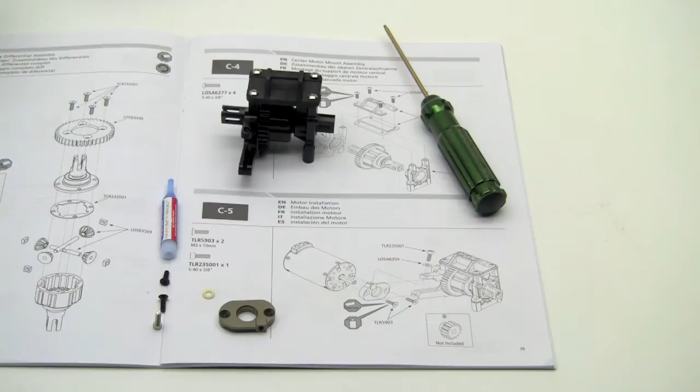We are on to step number C5. Fairly simple step. I've gotten our parts out that we're going to need here, and we will get rocking and rolling on it. The only thing that we are minus is our motor.

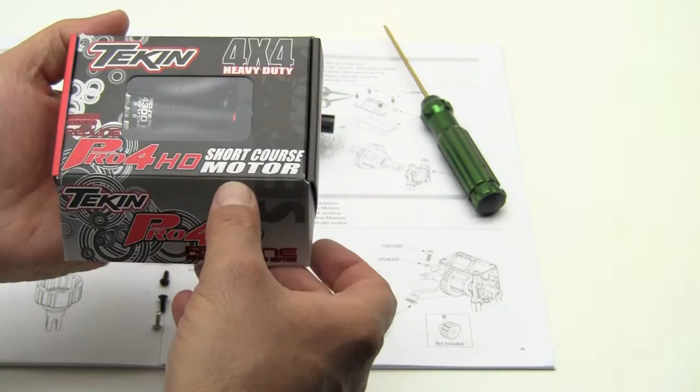So let's go ahead and open our motor up. We've got a Tekin Redline here, which is the Pro 4 HD motor.

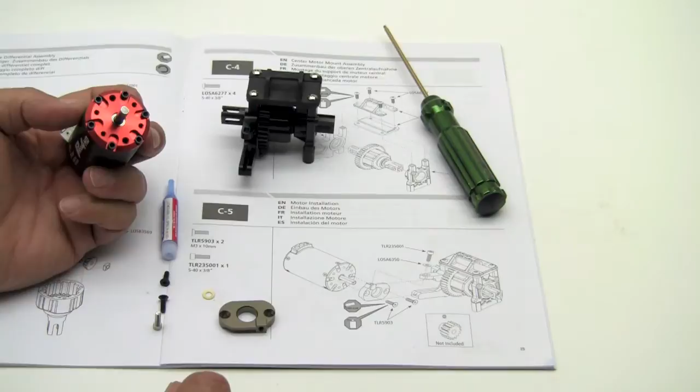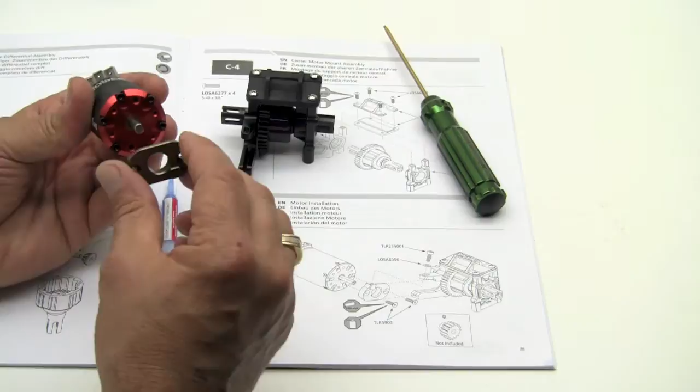Very nice motor, heavy. So we are going to install the motor mount, which is this metal unit, onto our motor. I'm going to follow the directions here and point my wire connections straight up in the air. We may come back and revisit that depending on how our wiring and our setup looks, but we're just going to go ahead and install this for the video.

And the motor mount holes are going to line up with the holes in the motor. Provided are the screws.

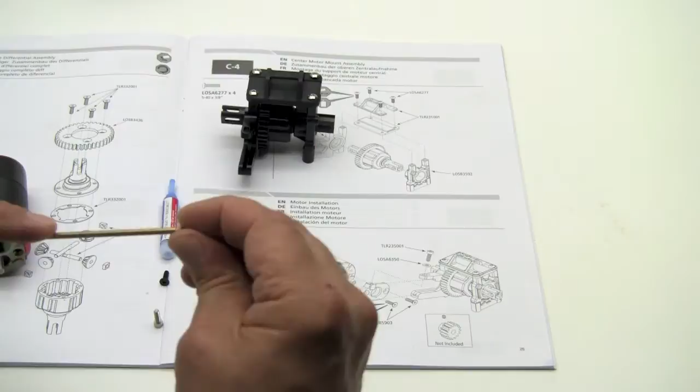Hey, it actually fits into the driver. Look at that. I'm going to use a little Loctite on there.

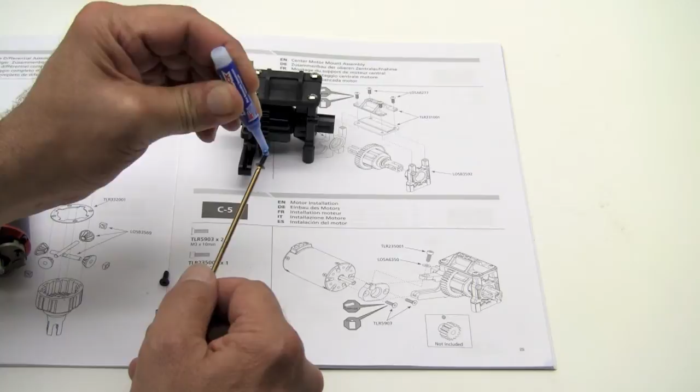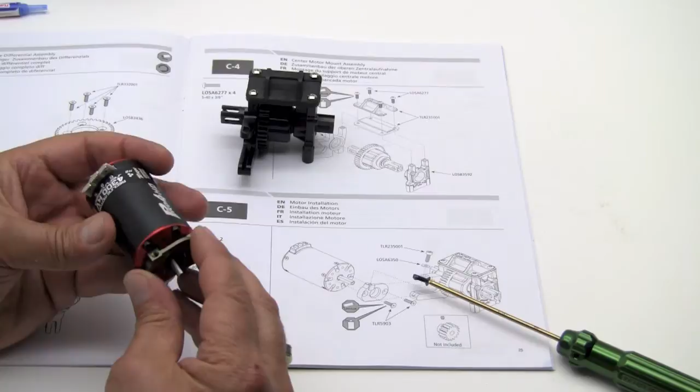And again, we are going to take a look at the mount and the motor. With the mount, we want the screw hole to be up in the air. And just by looking at the directions, for now, we might want to change the angle of the motor to clean up wiring or avoid anything. But right now, we're just going to mount it straight up and down.

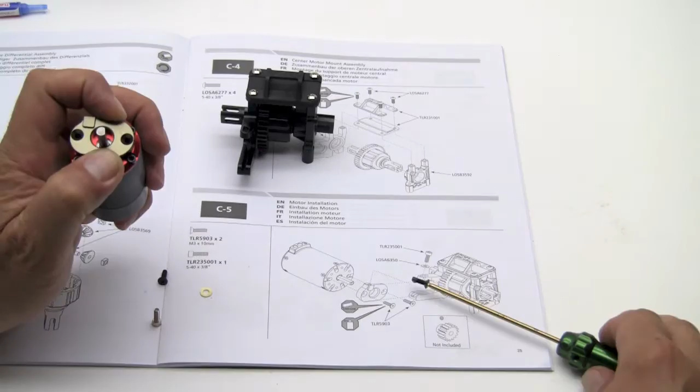The motor screw in. There's one.

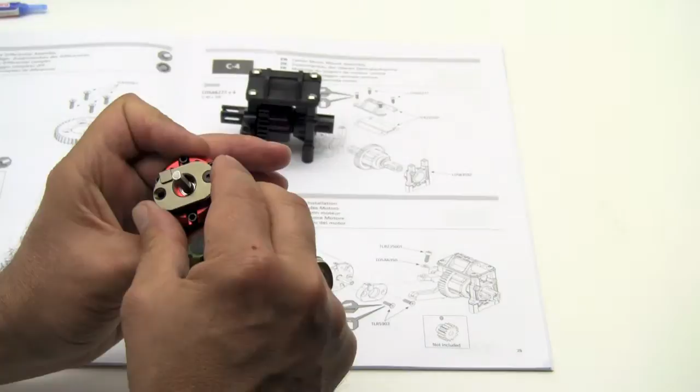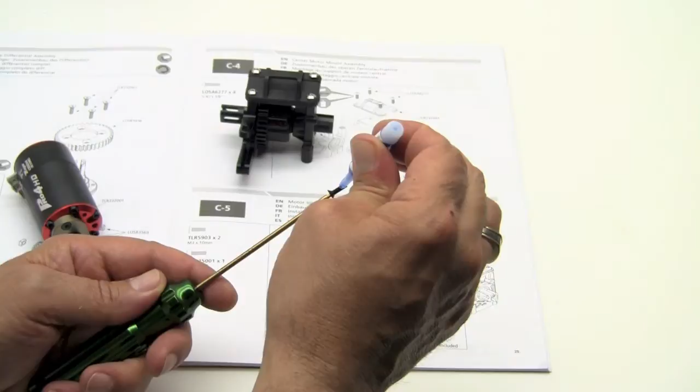Come on. I don't really want to put a lot on there, just a little bit.

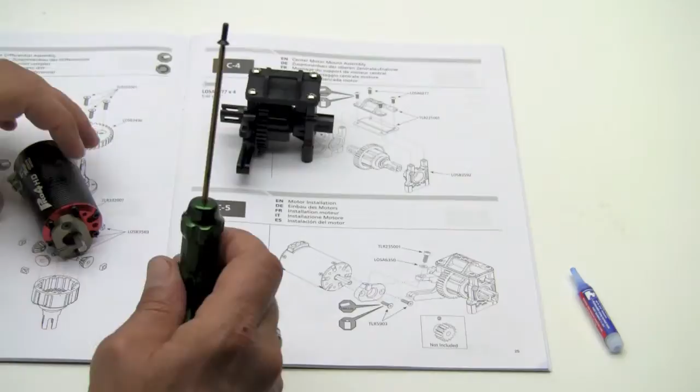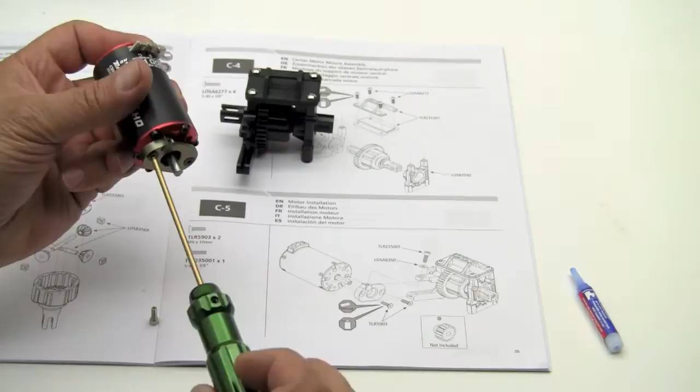Now, shown in the directions is a pinion gear. I've not chosen a pinion to use on here yet because I don't really know what the conditions are on the track I'm going to, so I'm going to save that.

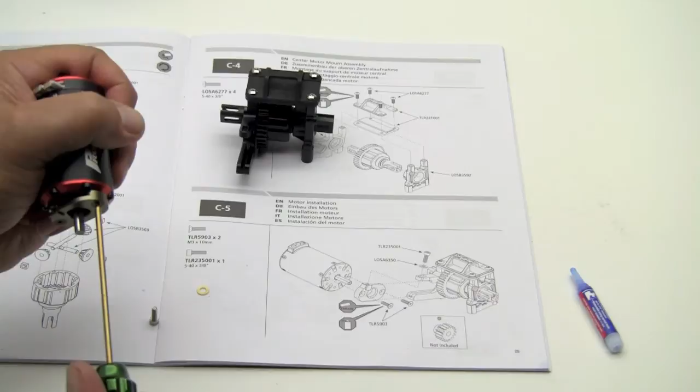And the second reason I'm not going to put the pinion on right at this time is because once the entire vehicle is put together, I want to make sure that everything rolls freely. If we have the pinion hooked up and meshed to the spur gear, it's not going to roll freely, and we just want to make sure that there's no binding going on.

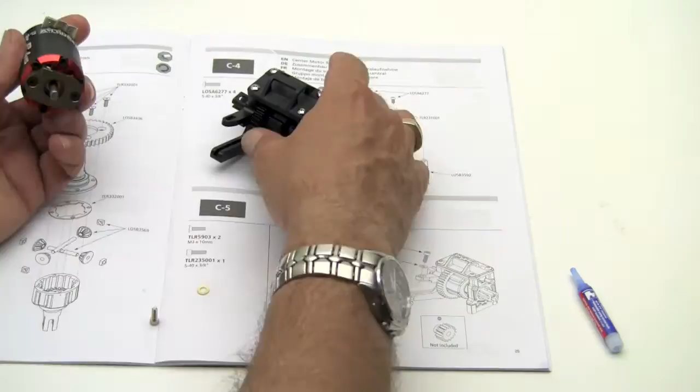So we have this lined up. Now this is a very nice little system. It's going to slide right into the mount here. Let me get a little bit of a close-up here. You can see.

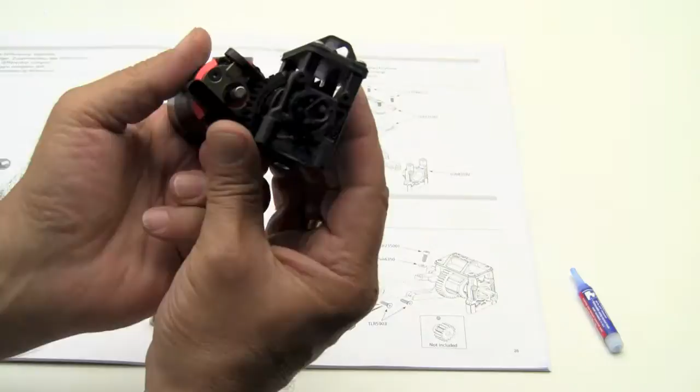Basically it slides in and out of the mount, and that's going to be able to adjust your mesh depending on what size pinion you're using.

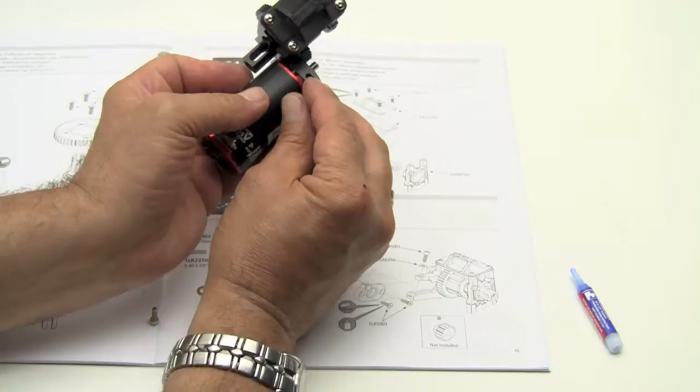And it is held in place with a screw from the top. There's a little washer that goes on the screw.

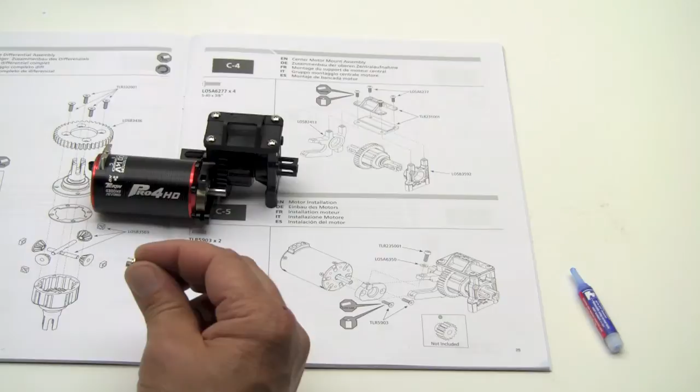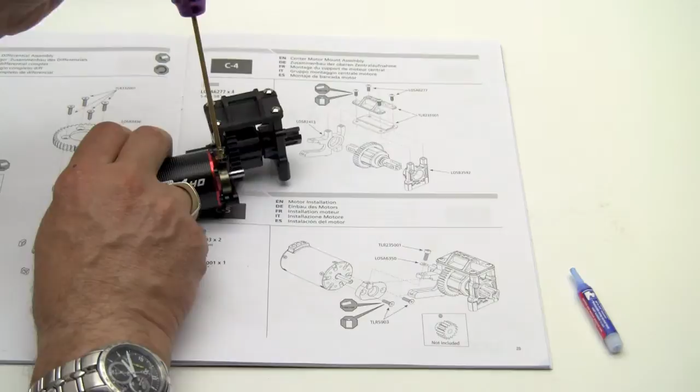I'm not going to put any Loctite on this for now because I'm going to be revisiting this when I put my pinion on. But we're going to insert the screw in and screw it in. Pretty straightforward. Just like that.

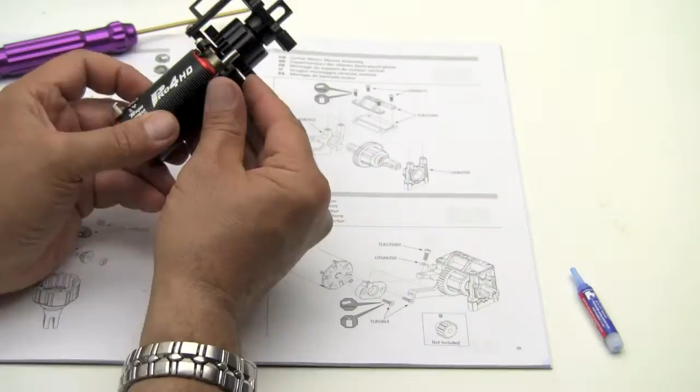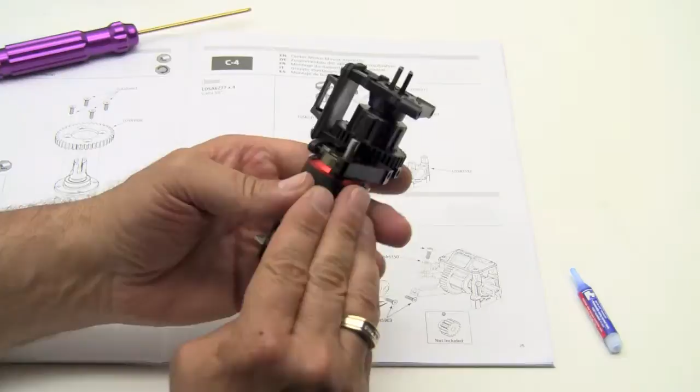That's how it's going to look. Okay. Off to the next directions.

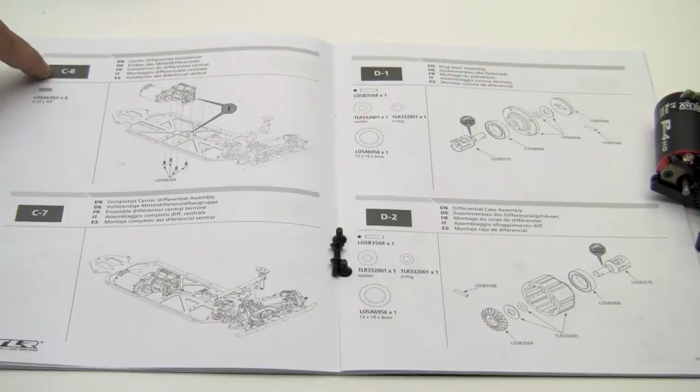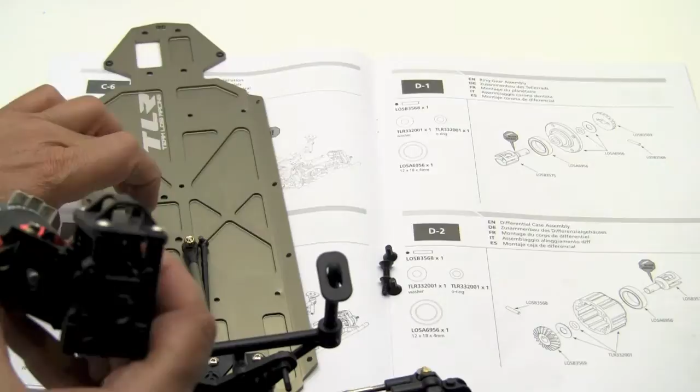Alright, now we are on to C6. Pretty straightforward. We're going to mount the center diff and motor to the chassis. Uses 4 bolts in the bottom. 2 are into plastic and 2 are into metal. Metal to metal, we're going to use some Loctite.

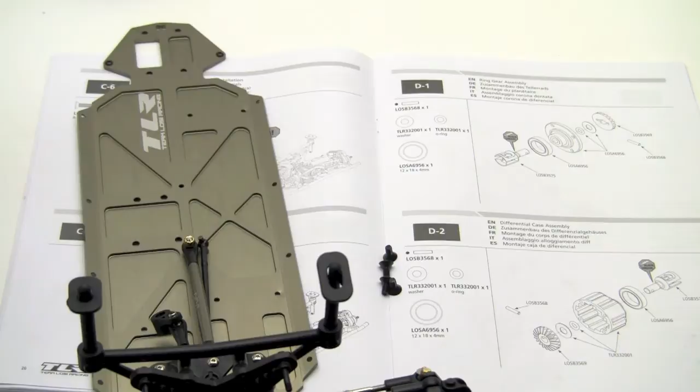So, now we need to figure out where this is going to mount up. Looks like it's mounting up here, according to the directions.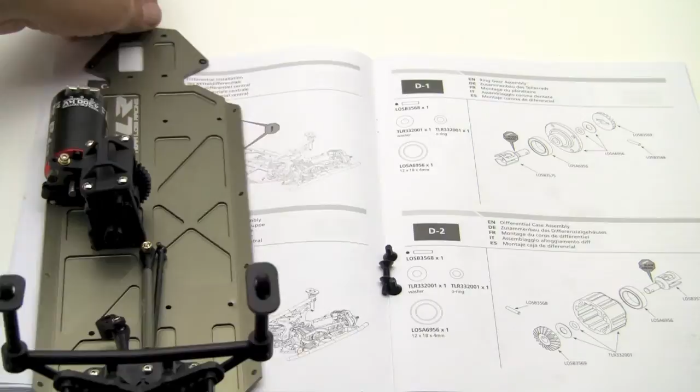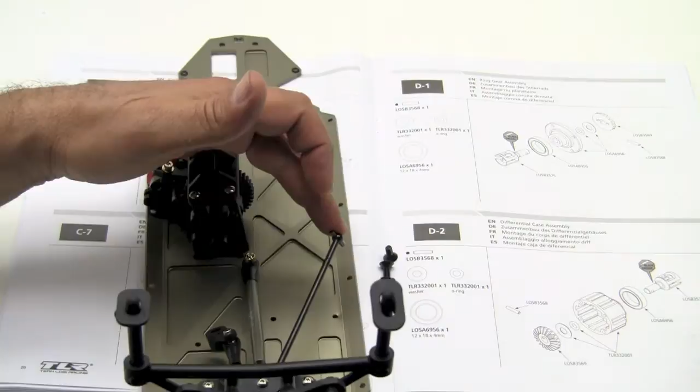So we have made a little mistake that we're going to have to rectify. And that is when we put the front clip in, we put the drive shaft off to the right side, and it should have been off to the left, so it can fit into the diff cup.

So, going to loosen up this screw here and move it over.

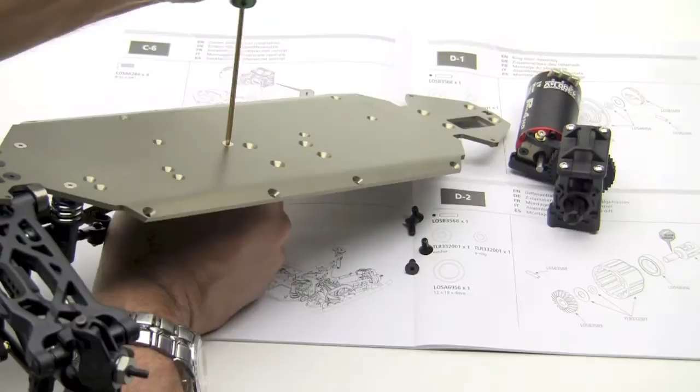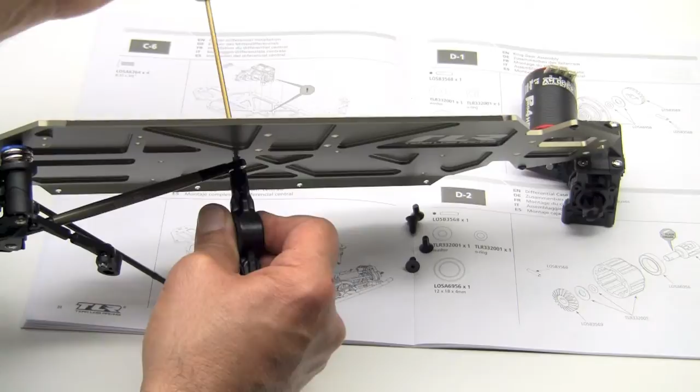Another one of these screws that doesn't fit the screwdriver. Okay, got that. We're very simply just going to swap sides here and put this back on.

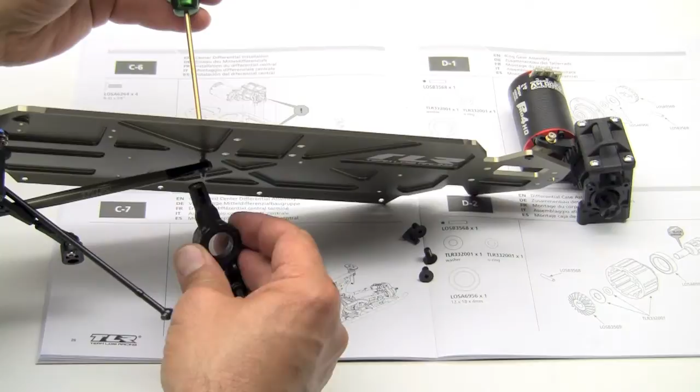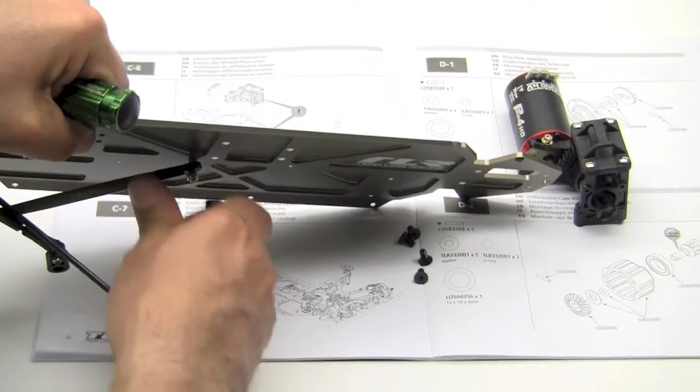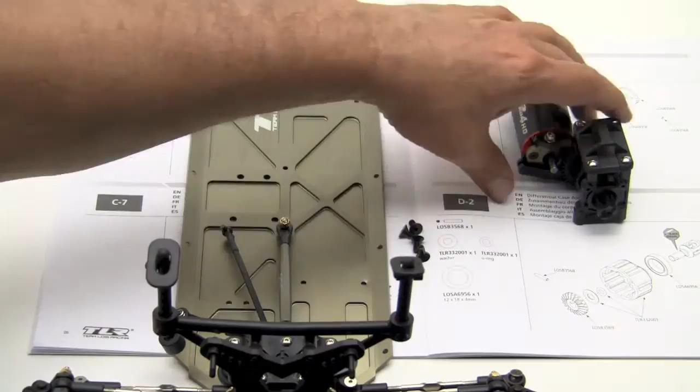There we go. Now you can see it goes off to this side. Move this out of the way. This is going to set right in here. And you need to make sure that your drive shaft is inserted into the cup.

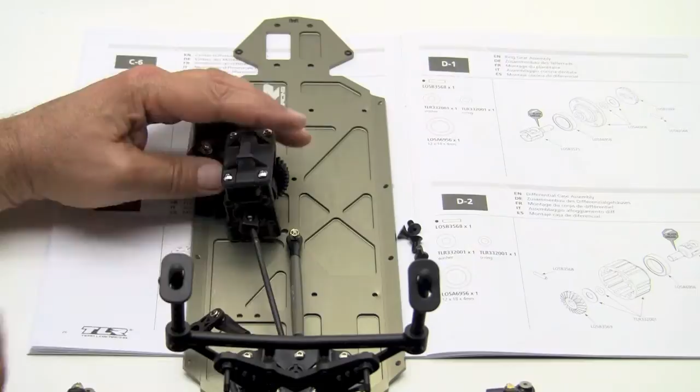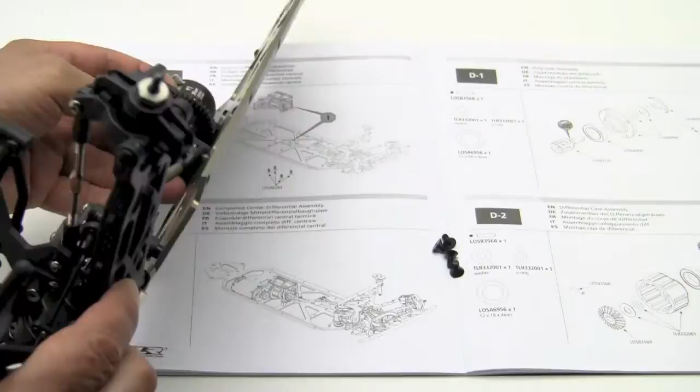And we are going to turn it upside down. And the front two holes are plastic, so we don't need Loctite. A little hard to hold this in there.

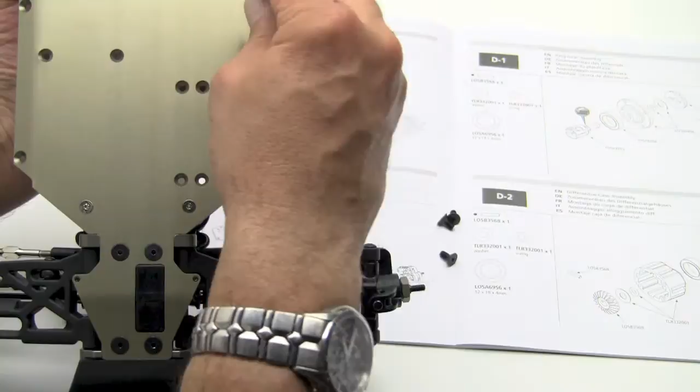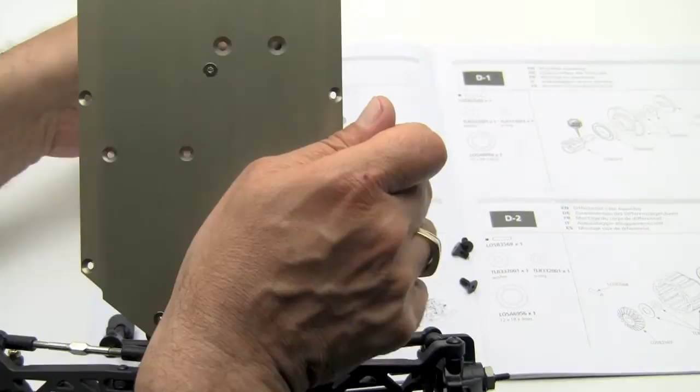Okay, sorry about that. False start. We're going out of our frame on our camera here. So we'll back that up a little bit.

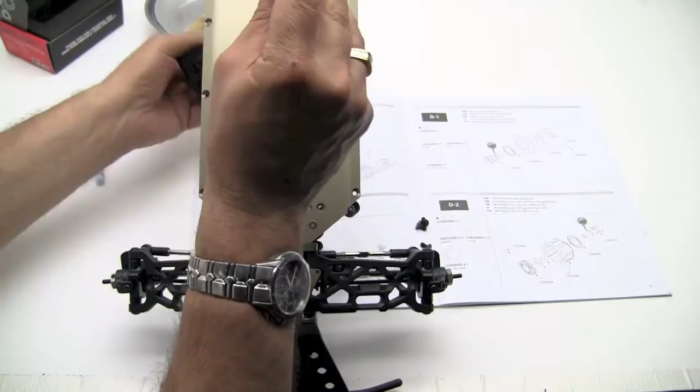Where did our wrench go? There we go. Put that little puppy in there. We're going to take our motor and line it up under here and screw it in.

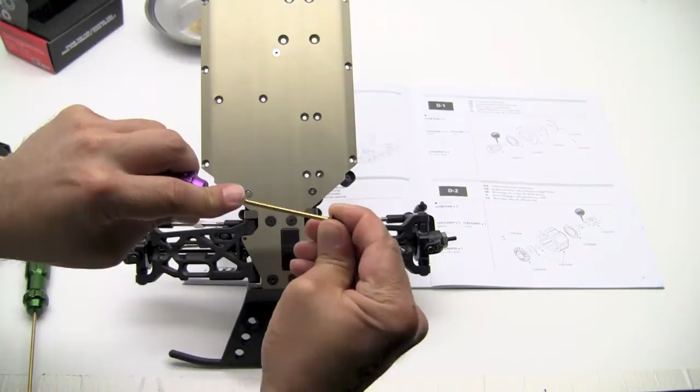Am I using the wrong wrench again? Boy, we are off to some false starts here on this one, gentlemen. Ladies, whoever. No wonder. It's one of these ones that doesn't want to fit in there again.

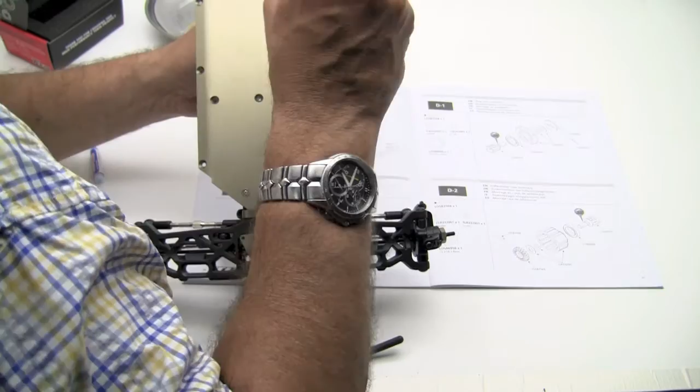Okay, so now we are going to grab our motor mount and we are going to line it up underneath here and screw the first screw in. Yay! We are on track here.

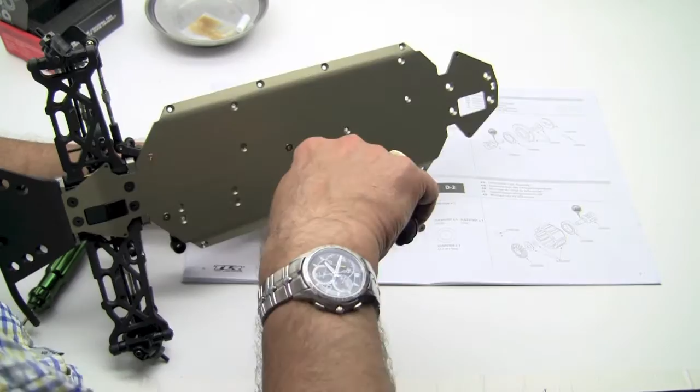And before I get carried away, let's make sure that our drive shaft is inserted into the cup. Come on, there we go.

And we will finish tightening. Damn it.

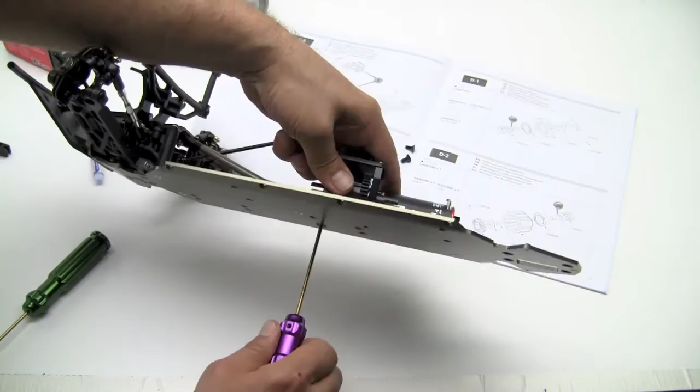Between the wrench not wanting to fit and keep coming out, and me trying to keep this thing into the camera frame, we're just not doing very well here, gentlemen.

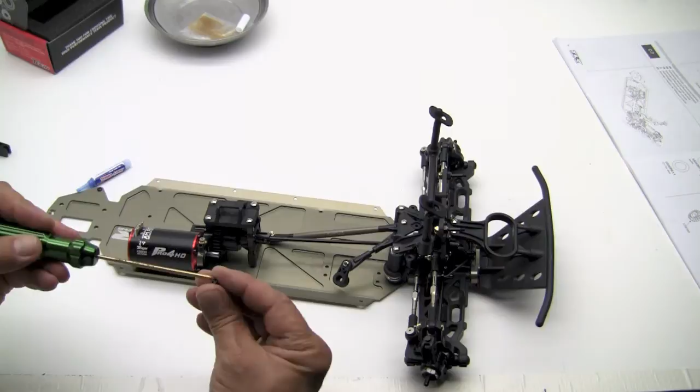Okay, so we're okay there. Let's put another screw on here, see if this one fits. Our wrench.

Gotta pound that head in there so it fits. Not good. Okay, this one we're going to put into the back, so it's going to have a little bit of Loctite on it.

Alright, now it's held into place and we can do a little better here. Alright, we got one of the back screws in.

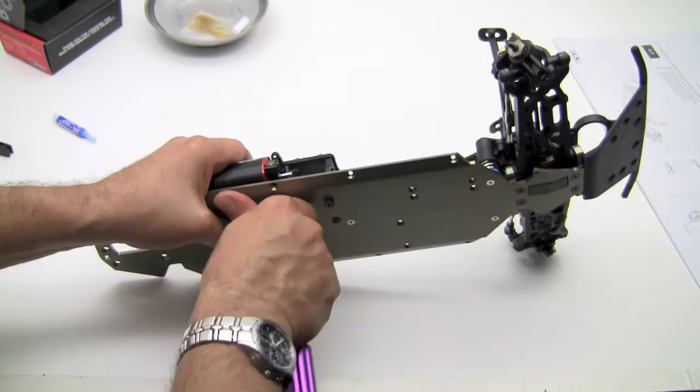This is silly. Just silly. These screws are something else. Not good.

Get this into the head of the screw so we can tighten this one down.

You know, and again on this, I've been through 4 different tool sets. We tried a Fast Eddy tool set, and it wouldn't fit properly. We tried a Thorpe tool set, which I have, and it wouldn't fit properly. And I tried a Losi tool set, which did not fit properly. And the only ones here that I can actually even get in, and I hate to even say it, is a set of Integy tools. And for some reason, I guess because they're such shitty quality, that they actually work in these screws a little bit. But they're still, they go into the holes. The other tool sets wouldn't even go into the holes on the screws. So, Losi, please, revisit your screw selection and vendor on this.

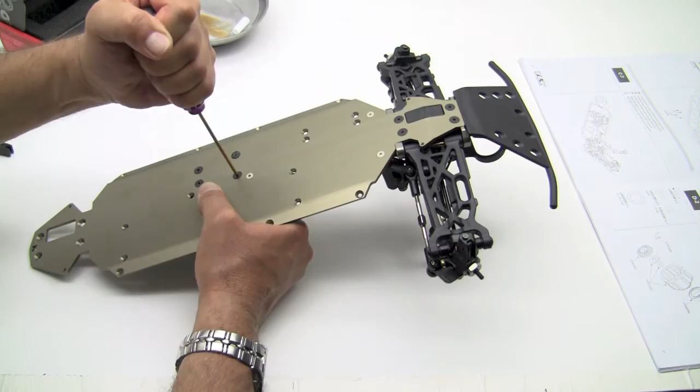Alright. We now have all 4 screws in. And this is how it looks.

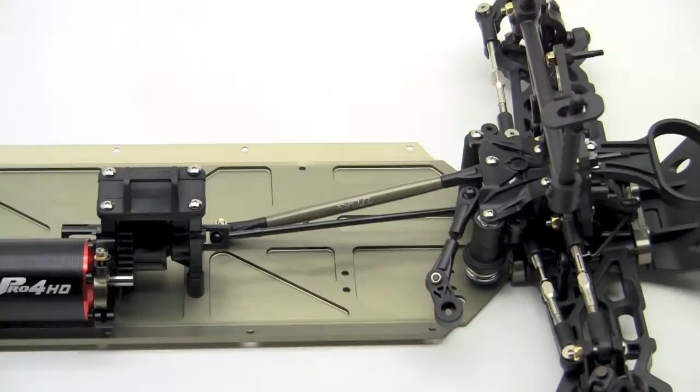Again, we're going to make sure that everything rolls freely. Ooh, you see something wrong there? I see something wrong. I'm going to zoom in here and you tell me if you see it. Are you ready? I'm going to spin the front wheels.

See something there? I see a bent dog bone. Or center shaft. Look at that. We are going to have to contact Losi or Horizon and have them send us another one because we can't have that. You know, so I can understand it being just a little bit out, but that's pretty far out.

And I'm looking at the other parts all the way up here to all the way back here, and it's definitely the shaft that's bent. So we're going to go ahead and finish the build, of course, but we're going to contact Horizon, which is usually very good about getting parts out. So you may want to double check yours to see if it is the same way.

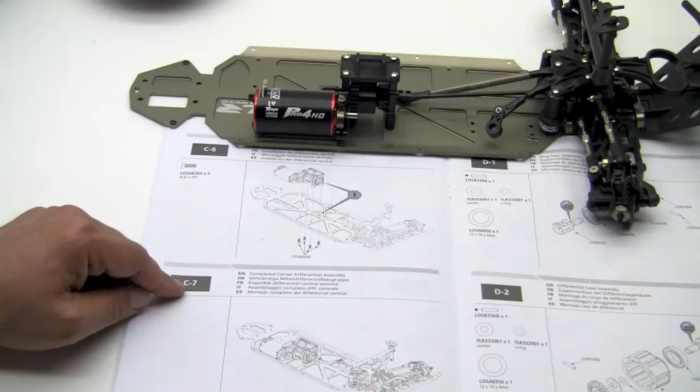Come on. Alright. So, we have now completed the C bag. And it is time to move on to the next step, which is D.

So get out your D bag. That sounds great, you D bag. Get the D bag, and we'll get rolling on the next one.